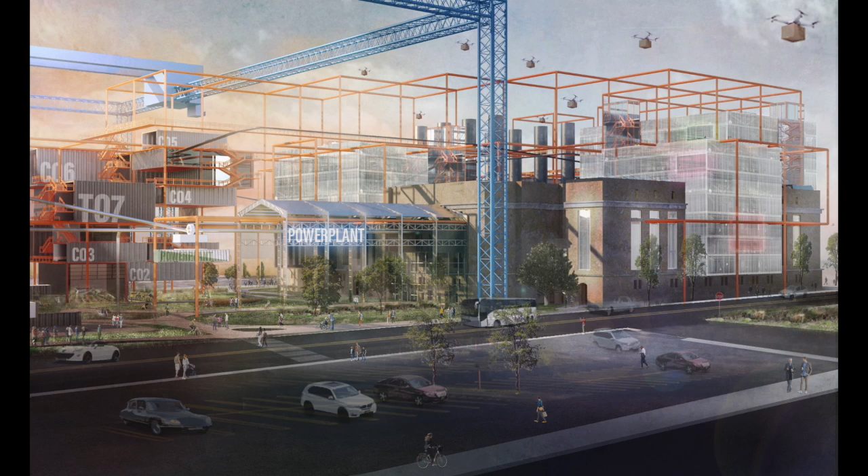Our final project is Power Plant, an adaptive reuse project transforming an abandoned Philadelphia power station into an urban farming innovation center.

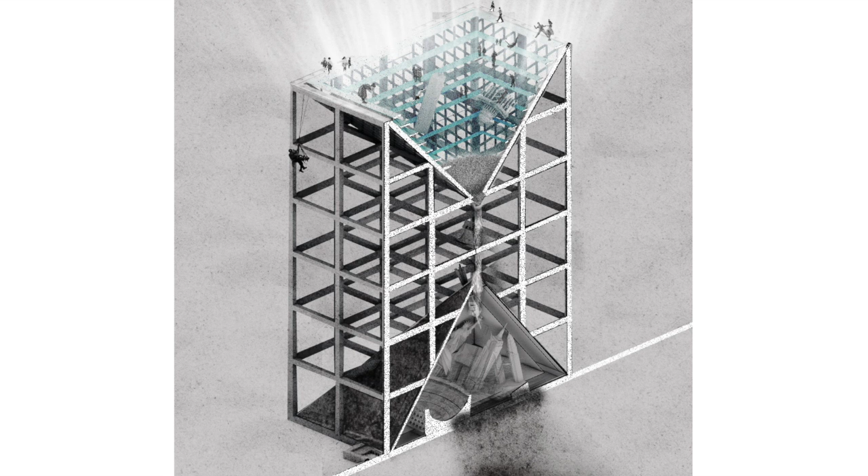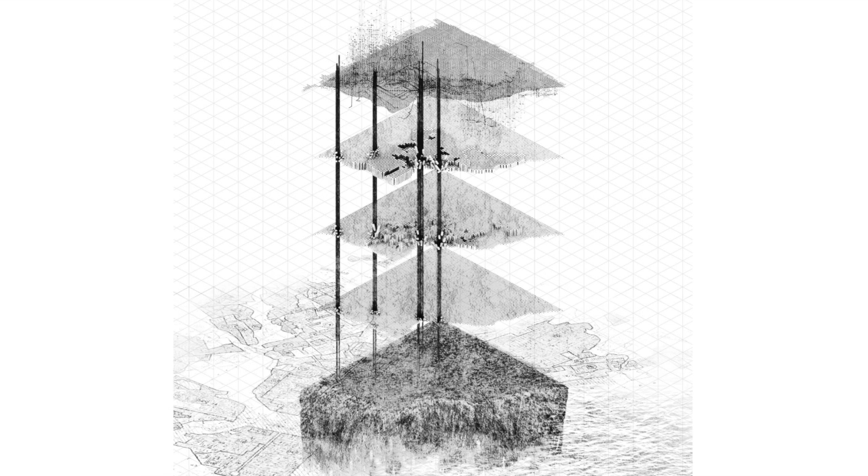Throughout the semester, we explored monumentality and its death, and from this derived our definition of new monumentality. We believe that new monumentality is no longer about the static ruin or entity commemorating an event or person, but is defined as celebrating architecture that evokes the ethos of a place. Ethos settles into an environment and rests within its bounds until it is stirred about, evoking a new interpretation of the origins. We believe new monumentality should continue to be expanded upon, passed on to inspire other generations to come.

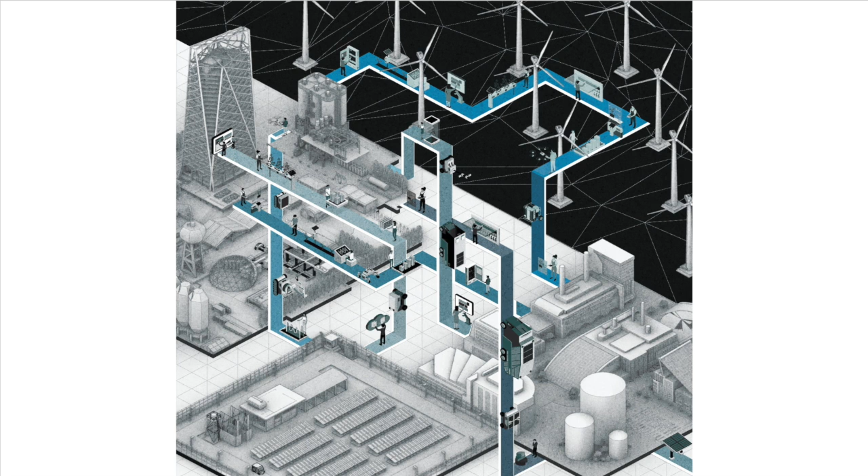Philadelphia is coming into the 2020s as a city that on many issues is on the right path, but it is still being held back by some challenges from the previous decade. This has made it the poorest large city in America, lagging far behind its peer metros like New York City.

Looking into some of the issues holding Philadelphia back, more than a quarter of its residents live below the poverty line. A lack of job opportunities within the Philadelphia area has contributed to the city trailing behind its peer metros. Evolving with the technological era is also a prominent issue, and lastly, 1 in 5 Philadelphians suffer from food insecurity.

These issues differ across the board, however they are in more ways than not intertwined. Seeing the connection between them, we developed a reciprocal approach, one with common ground, that could simultaneously address these differing issues. In our search for a domino effect in which we start to address these issues, we found urban farming to be a key catalyst.

In the article Growing Urban Agriculture, it states that urban agriculture is one of the most economically efficient ways to revitalize an entire community. With it come several benefits such as improving access to healthy food, work training and job development, economic health, and revitalization to neighborhoods.

In our search for a suitable site to accommodate our proposed catalyst for change, we set out the following parameters. Firstly, it had to be within transit distance of the neighborhoods mostly affected by these social issues. Subsequently, it had to have the infrastructural qualities to facilitate our proposed program. Next, the site was to possess historical and architectural significance rooted in the development of the Philadelphia area, with an embedded ethos to exhibit our concept of new monumentality.

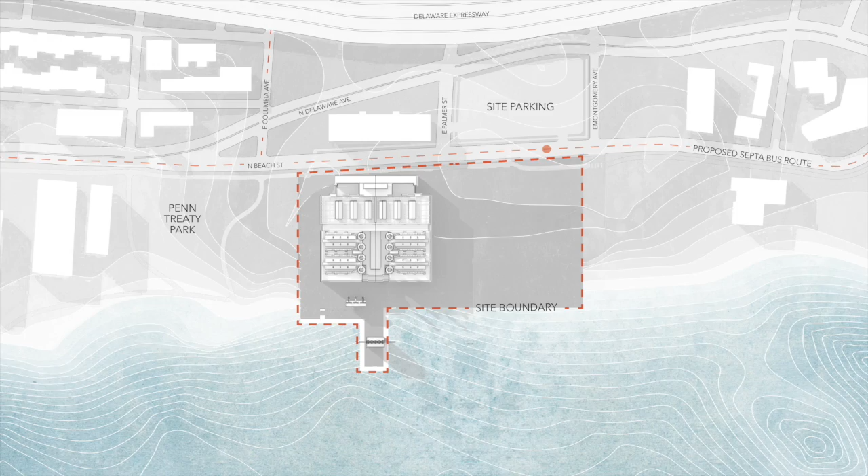The PECO Delaware station checked all these boxes. It is within 20 to 30 minutes of transit time from downtown using the SEPTA public transport system of Philadelphia. Also, the site conveniently sits along the bank of the Delaware River, which gives it infrastructural merit.

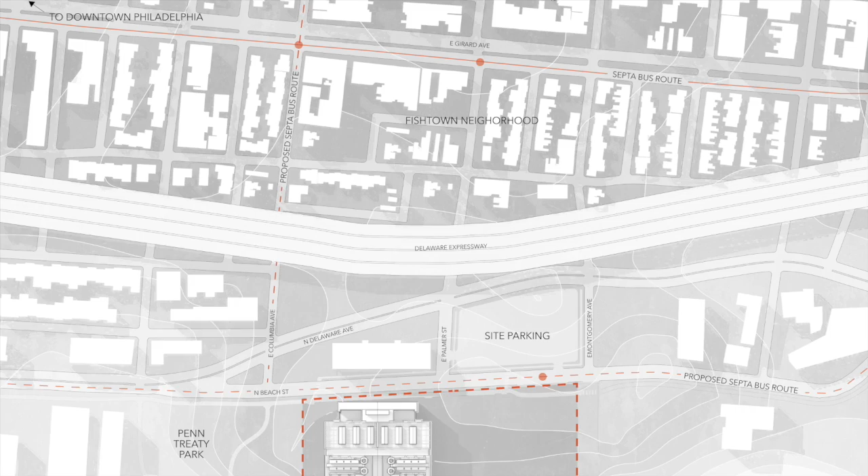Historically, the site houses the now abandoned PECO Delaware station, a monumental electric power plant built in 1917 and operational up until 2004. It was the main electric power plant in Philadelphia at the time and was instrumental in transitioning the Philadelphia area from gas-powered lighting to the then-new technology of electricity with its Wire Your House campaign.

Architecturally, it was the first to be constructed with reinforced concrete rather than steel. In its hearing to be designated as a National Historic Monument, it was said that it embodied a strong sense of community engagement and rich cultural history.

We represent the new monumentality in PECO through a virtual study. Our model sits in an old, abandoned power plant space. Just like PECO, it is abandoned and dead space. We found it to be the perfect contrast for a bright, colorful, and liberated future. This model shows the storyline of how we believe new monumentality will be embedded into this old, abandoned power plant.

A volume crashes into an environment, creating openings that allow new light and shadows to frame an existing infrastructure, bringing new perspective. In the volumetric spaces are scenes that replicate a contrasted future for our power plant. What was once dark, gloomy, and uninspiring now exudes bright, colorful, yet rigid infrastructural setting.

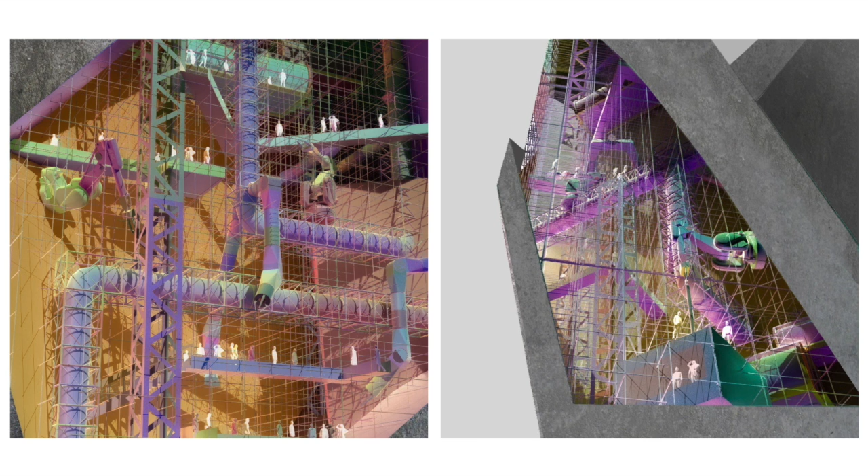The story of our gift starts with the history of our site and its function. It starts with the Wire Your House campaign, which was to encourage and educate people about the then new technology of electricity.

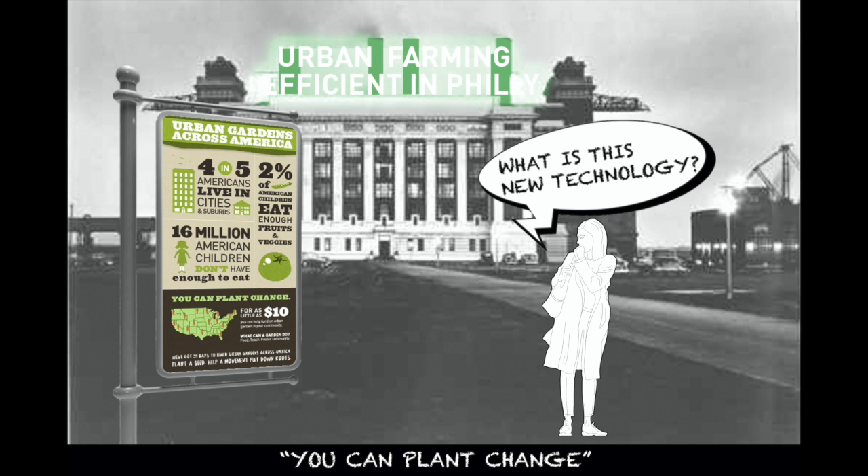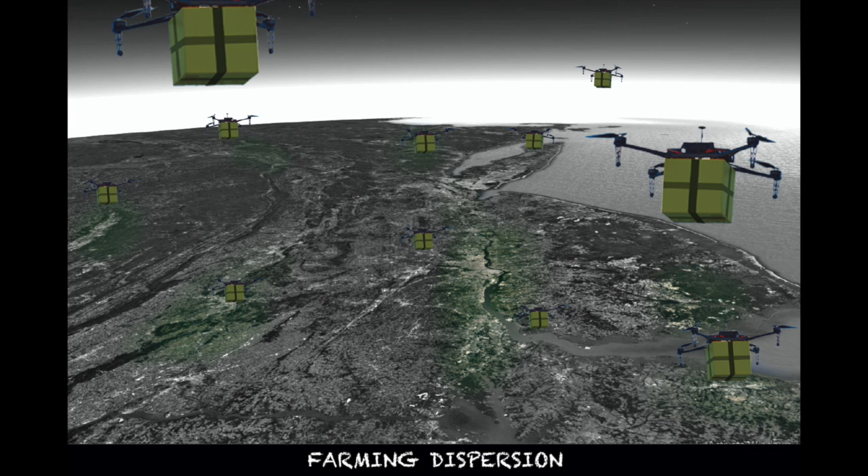With the monumental impact occurring beyond the four walls of the building, it was clear that an output-focused approach was best to manifest our concept of new monumentality. Our program focuses on engaging with the residents of Philadelphia and evolves into a transformative impact.

Individuals and large groups are drawn to learning and public engagement opportunities at our site. Users can focus on certain skills or technologies with the intention of implementing them once they leave the site. Urban farming kits will be transported to their communities containing elements specific to their needs and requests.

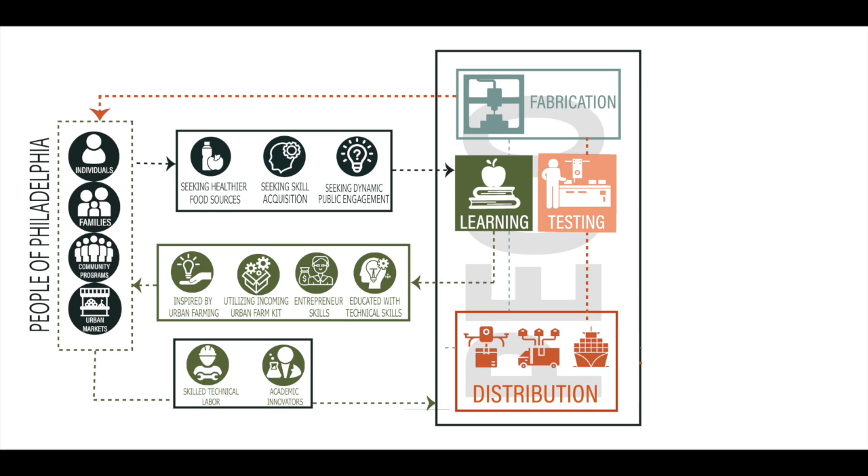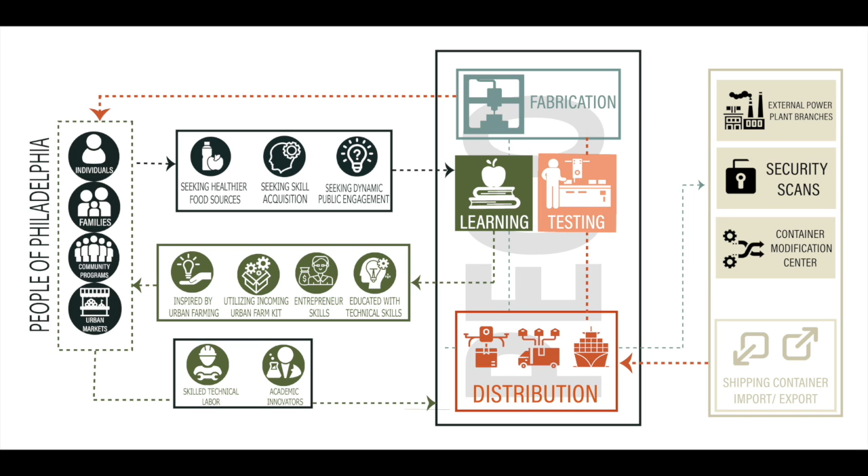The system is made possible by external connections. In order to preserve the public functions of our site, container scans, security, and modifications to shipping containers occur off-site. The site's location on the Delaware River allows for a seamless connection to local riverside sites for shipping and shipping container modification.

These vital connections and transportation methods via drone, ship, and truck allow our site to have a monumental impact well beyond the site itself.

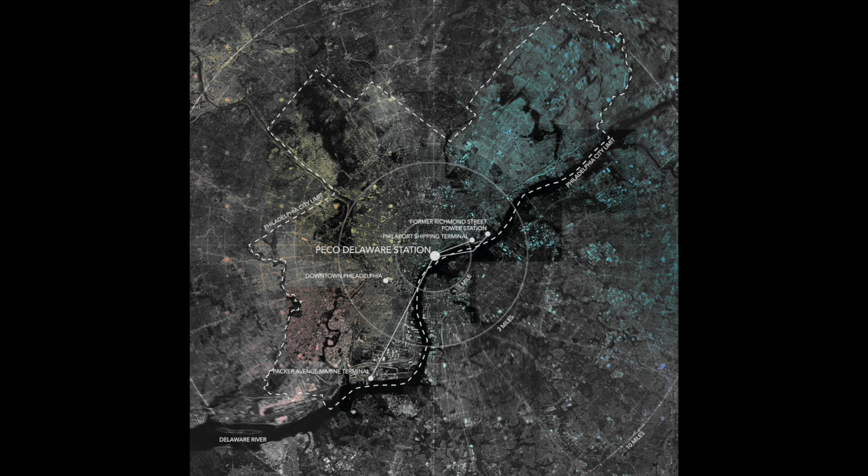We believe that this system will be a catalyst, impacting well beyond Philadelphia. The future of shipping will present additional manners to reach further and further beyond our site. This chain reaction will occur both conceptually and physically.

We decided to look deeper into what urban farming consists of and choose specific aspects that could be beneficial to Philadelphia. Hence, we identified the following specific urban farming program hubs: aquaponics, aeroponics, soil quality and composting, plant and seed development, and finally food application and nutrition.

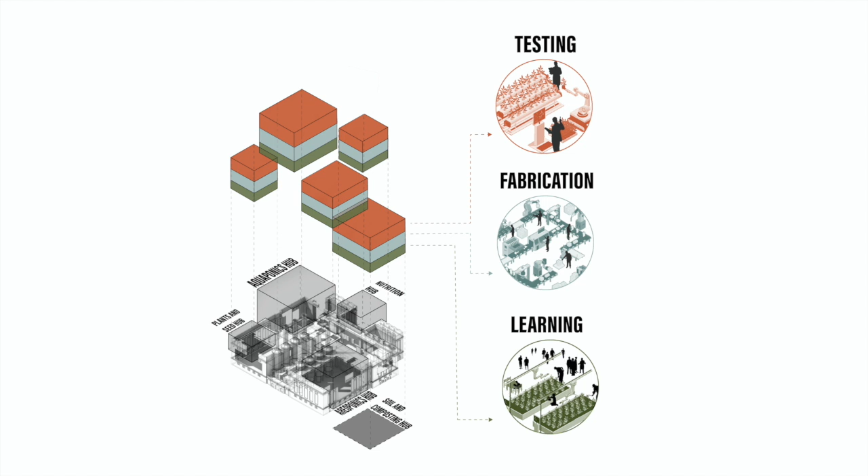We developed dynamic program modules composed of fabrication, education, and testing modules dispersed among these specific hubs.

So first, we have the site, which is about 5.5 acres, and the existing PECO power plant already occupies about half of it. Then we established the grid from the existing building dimensions to facilitate our proposed additions and aesthetically establish the new era industrial architectural language.

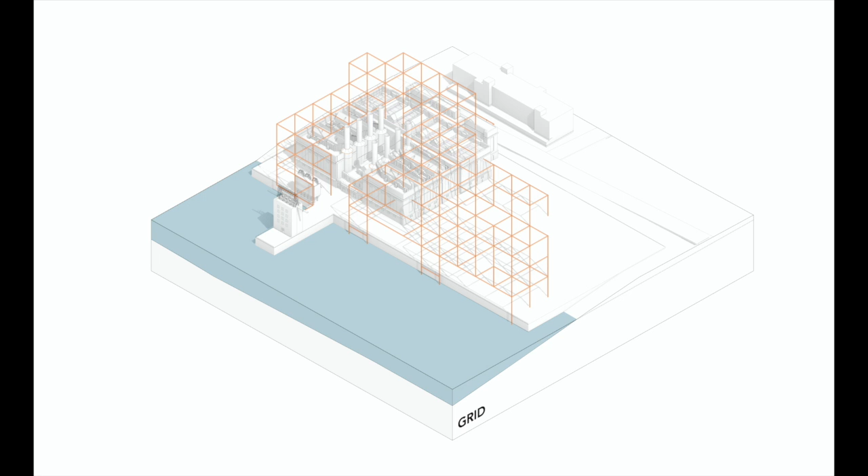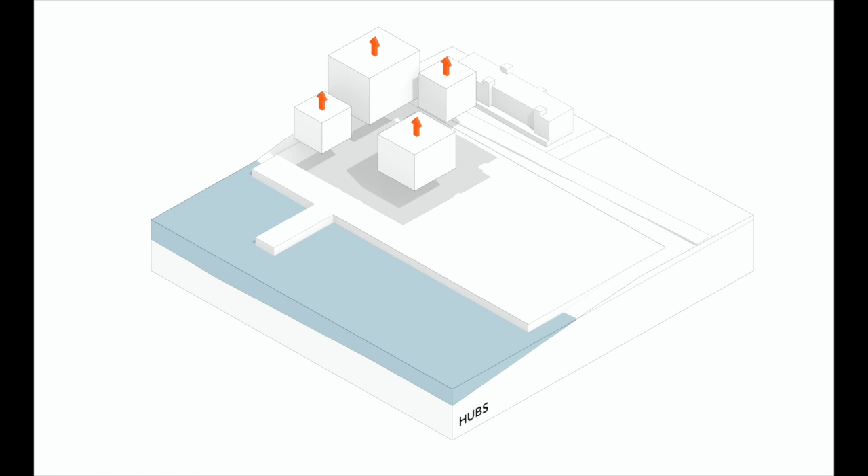Next, we placed the program hub strategically around the existing building to actively engage it, and also outside it to exemplify our growth beyond it as well. We also elevated the hubs within the existing building to allow for an open ground floor plan.

Then we reoriented the entrance to the site so we could establish an unobstructed pathway between the outdoor and indoor atriums. Then we arranged the modules within each hub.

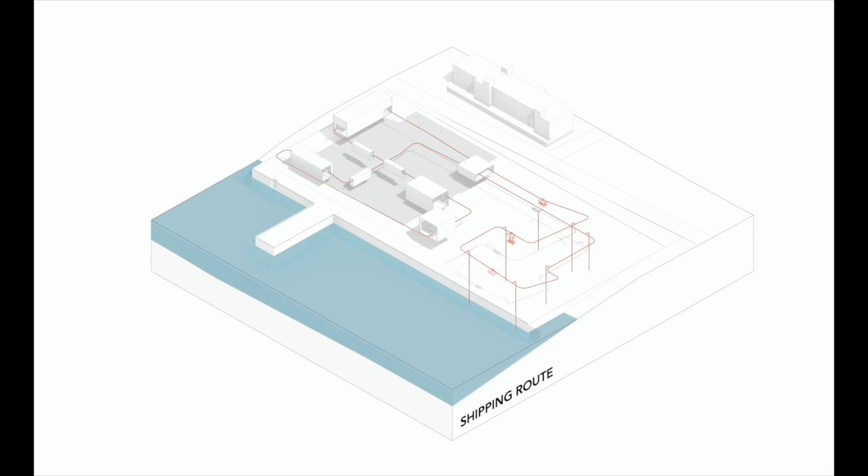With our output approach, we developed a container transport route which circulates through the fabrication modules of each hub. Supplementally, a crane system was designed to help facilitate the movement and storage of these repurposed shipping containers on the site.

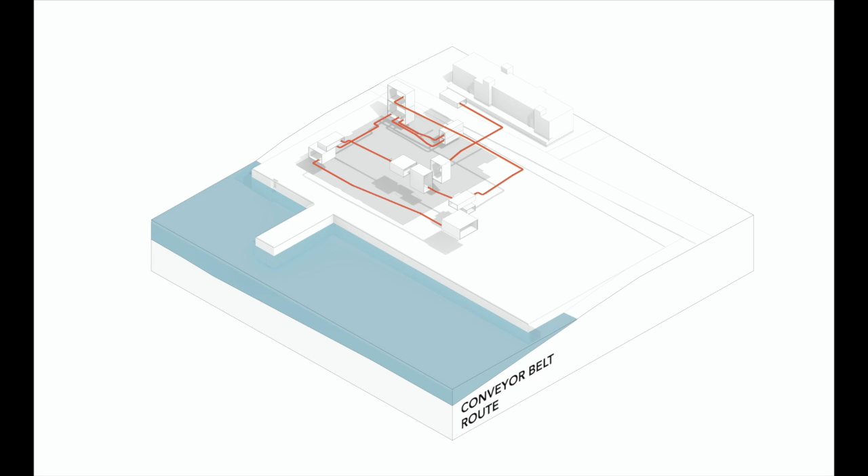Then, a conveyor belt route was designed between different testing modules of each hub to accommodate cross-pollination of ideas and equipment from one hub to another.

Then, our output and distribution routes pass through the drone depot area, which is the final stop for the equipment and products to be shipped out to the community.

Lastly, a pathway is drawn from the adjacent Penn Treaty Park and runs along our entire site. Also, our strategically arranged modules allow for a series of terraced spaces which would host a series of social and recreational programs within the whole site.

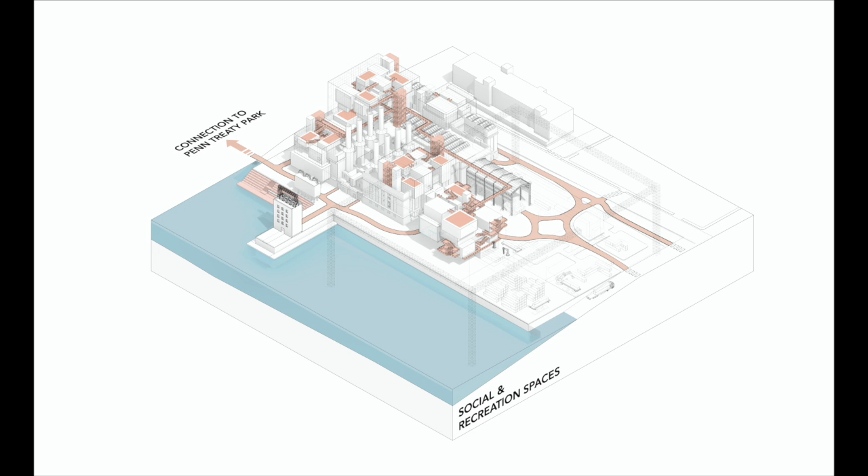We developed a step pier area on our site adjacent to the park and leading to the river to do our part to contribute to the ongoing efforts to revitalize the waterfront. It also gives another avenue in which to attract people to our site, which is pivotal for our program.

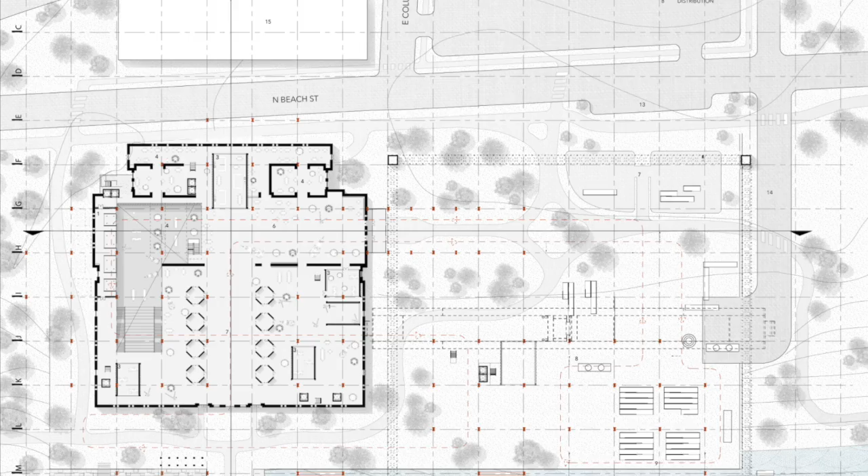Transitioning from the various activities outside, the open interior of the ground floor allows for this public engagement to continue and be enhanced within the building's volume. Nearly all of the first floor serves as public engagement and atrium spaces.

Each hub touches down on the ground floor with a learning or testing space, as well as vertical circulation, serving as a tectonic invitation to the public to explore the hubs above.

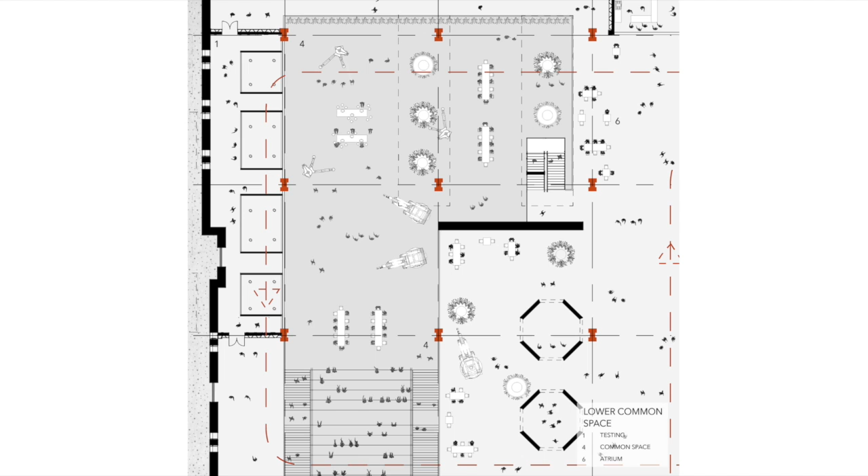This concept of engaging the public with urban farming innovations is brought to life on the ground level. This drawing shows how users in the atrium's lower common space can observe elements such as aquaponic tanks, robotic arms, and hydroponic towers. The design of the ground floor exemplifies the intersection of the public with the building's innovative program.

When entering the space, you are immediately engaged with the liveliness that the building entails. Within the space, shipping containers glide along their routes, glazing reveals learning and testing programs, and conveyor belts transport items throughout the site. The space showcases innovations being worked on in separate testing programs while attracting the public to interact and learn more.

A market space is held in the near back, supplying food to the public that has been grown, and the open light well attracts the user to look above the monumental building that expands up from the existing space.

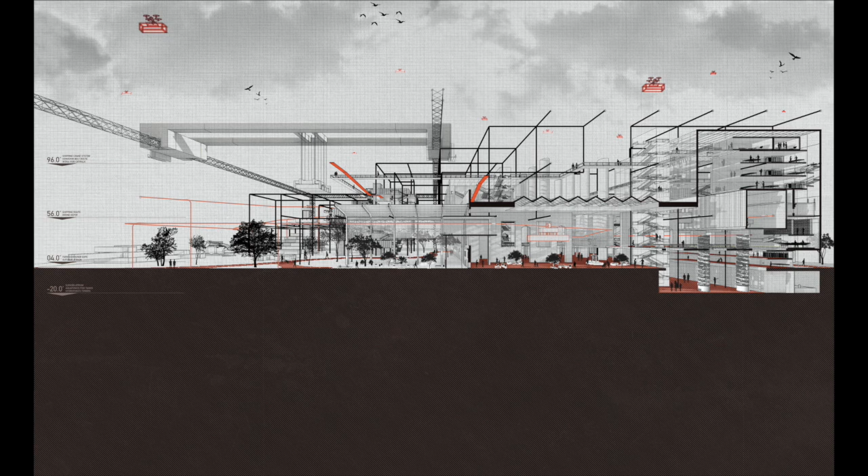At the end of this section is the aquaponics hub, showcasing the hydroponic towers and the racks and shelves of produce being grown within the modules.

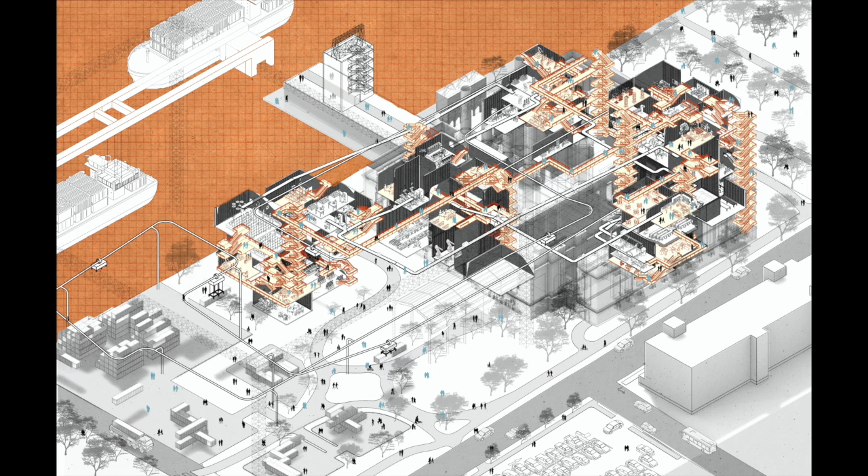This axon shows the complex circulation that happens throughout the building. We designed stairwells and walkways for each hub for a continuous connection. The open, continuous path leads the public to learning spaces which they can only enter, keeping the testing centers and fabrication spaces more secure for workers.

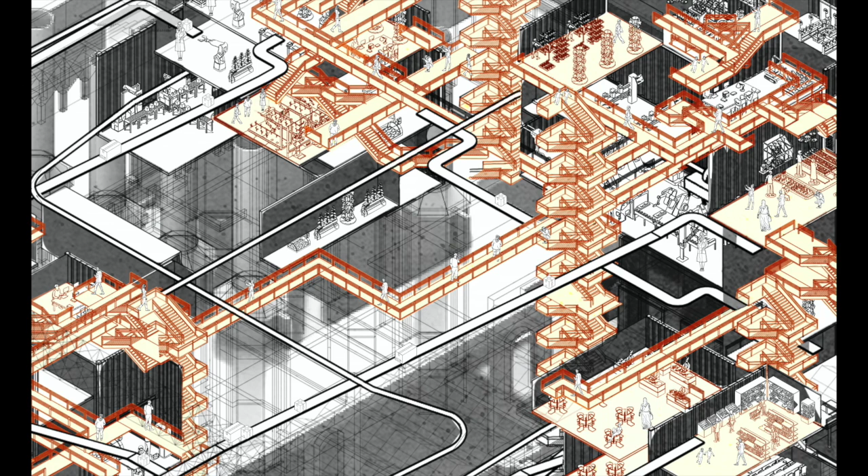Each hub has its own internal circulation connection, helping the public move through the spaces, still being exposed to the innovations that are being made in the testing and fabrication centers. The circulation keeps the user engaged and curious to wonder what's around the corner.

Slicing through the building reveals the contents of the hubs as well as the connections between each hub. Along with the user circulation, conveyor belts and the shipping container route link each of the various spaces.

At this level, the hub typology truly comes to life, showing how ideas, instruments, and production can be shared within each hub, then with the adjacent hubs.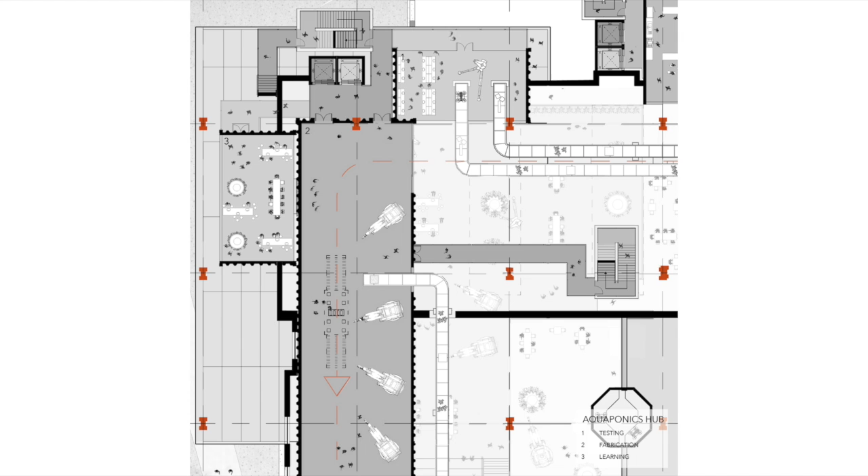Through firsthand experience, visitors can really be immersed in the urban farming simulator. The public can learn from professionals about new developing technologies in urban farming.

These spaces are designed to show the public the benefits of urban farming and how they themselves can use it in their own life. Classes and tours can be held here, giving a deeper understanding of how urban farming works.

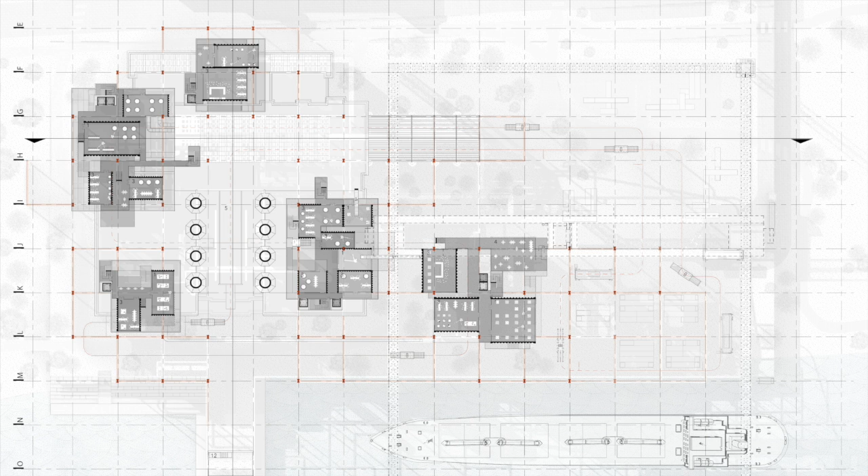This plan reveals how these learning spaces can fit together within the architectural context. Each program supports and enhances the nearby spaces, creating dynamic and practical hub environments.

Here you can see how the aquaponics hub exemplifies these qualities. Lab tables and aeroponic towers populate this space, providing spaces to educate the public on how to implement their own aeroponic systems. The seed quality and composting hub is the only one that lands outside of the building footprint.

It takes advantage of the natural sun and ventilation to optimize its function. The expansive grid framework ties this hub to the main building.

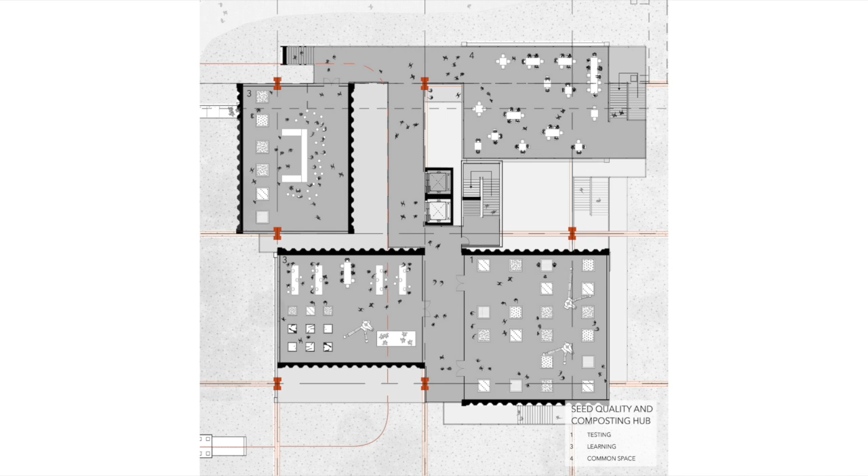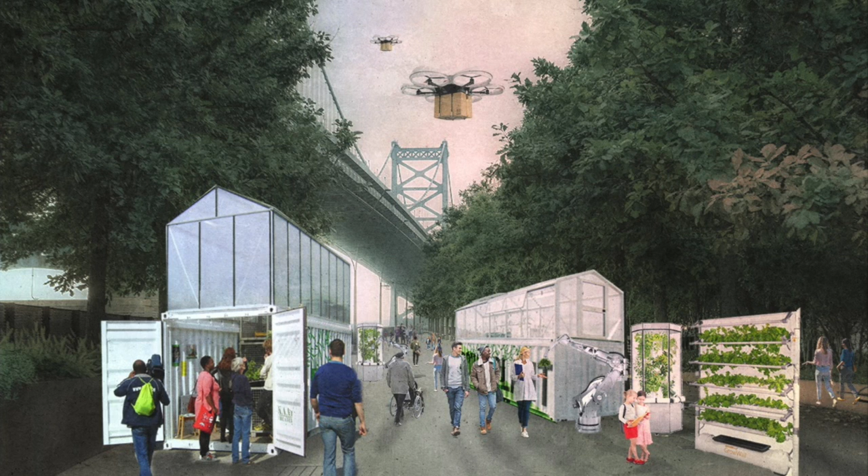After learning and practicing how to use this urban farming equipment, the user can select their ideal equipment and tools to be transported to their neighborhoods via drones, delivery, and urban farming retrofitted shipping containers. Through this, the benefits and applications of high-tech farming grow well beyond our space.

Through this project, we have used urban farming innovations to stir about the ethos of Philadelphia's PECO Power Station, defining a new monumentality that reaches far beyond its source.